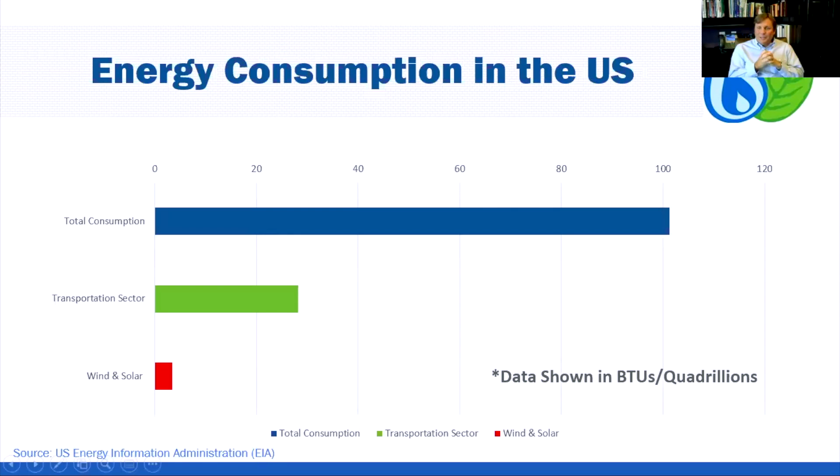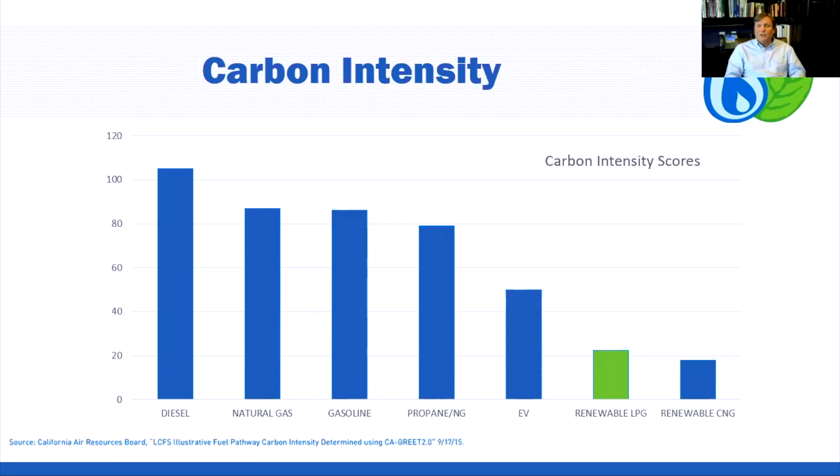Propane coming from natural gas is 79. So even if you blended 30% renewable LPG with 70% fossil propane from natural gas, we're in the 50s, about the same carbon intensity as an electric vehicle. Carbon intensity is something we need to consider. Of course, if we could have enough production for 100% renewable LPG or AutoGas going into vehicles, we'd have less than half the carbon intensity of an electric vehicle. But even blending 70% fossil propane with 30% renewable, we're still in the 50s, about equivalent to an electric vehicle.

Here's another important point: a vehicle today using an internal combustion engine emits 99% fewer emissions than a vehicle in 1970 - 99% fewer emissions than a vehicle from 50 years ago. Why is that important? It's because advancements are being made every single day, week, month, and year in internal combustion technology that goes into vehicles.

This is a simple one - I'm not sure people really understand this transition taking place. A port injection petrol or gasoline engine, if you took a port injection propane engine, you reduce CO2 emissions by 12%. But today, new engines are being produced with direct injection technology. Not all of them, but a great majority of the transition is happening very swiftly.

If you took a direct injection engine, for example a 3.3 liter Ford F-150 pickup truck right now, it's got a direct injection engine in it. But if you took a port injection Ford from 5 years ago and compared it to a current 3.3 liter or 5.0 liter F-150, there's 32% less CO2 emissions. That's a dramatic improvement, and vehicle technology will continue to improve through turbocharging and other methods. Engine technology advancements are really critical to help us meet our emissions goals in this country, because they're going to be more prolific than electric vehicles or hydrogen vehicles.

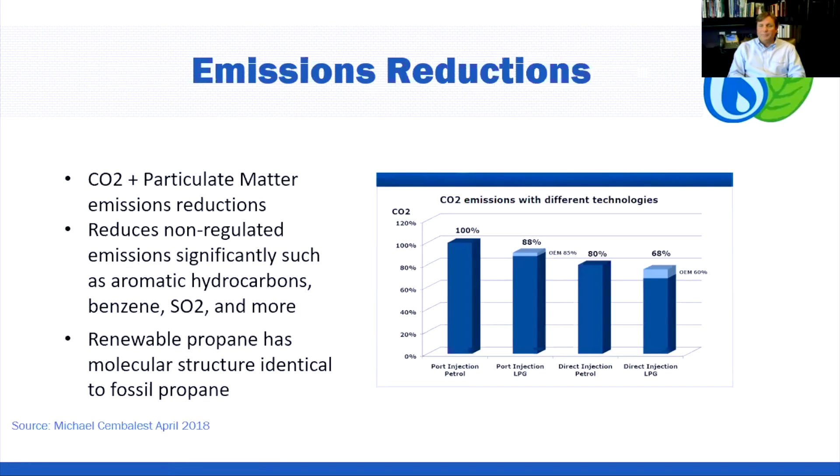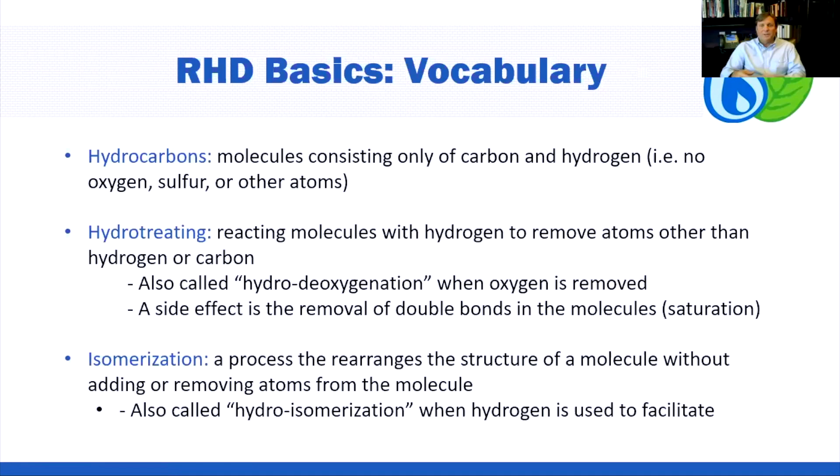So the term which I stumble over frequently is hydrodeoxygenation. That's when oxygen is removed, and the side effect is you remove these double bonds. The other part of this process is isomerization, which rearranges the structures of the molecules without adding or removing atoms. That's a really broad overview of how feedstocks are converted to make propane or diesel.

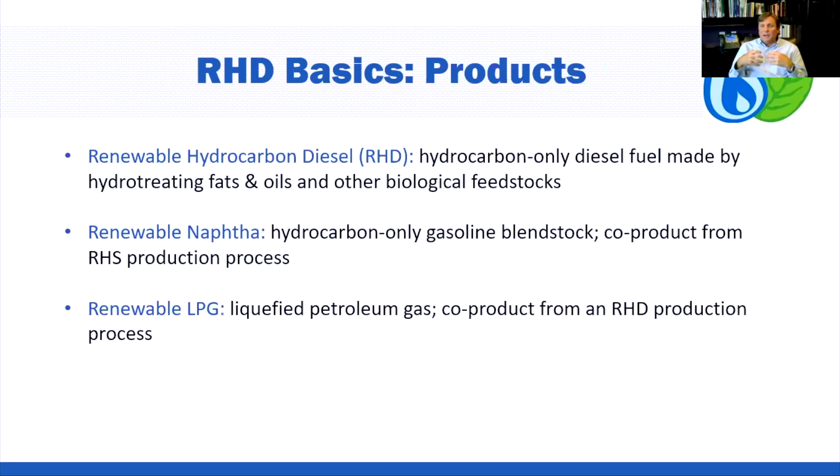Today there's only one renewable diesel refining facility in the United States that has made what I'd say is a reasonable incremental investment to produce propane. That's primarily because there isn't much awareness that renewable propane is something we need in this country, which goes back to the earlier point that we need to state renewable and fossil LPG AutoGas is an important part of our transportation future, and we need to create demand.

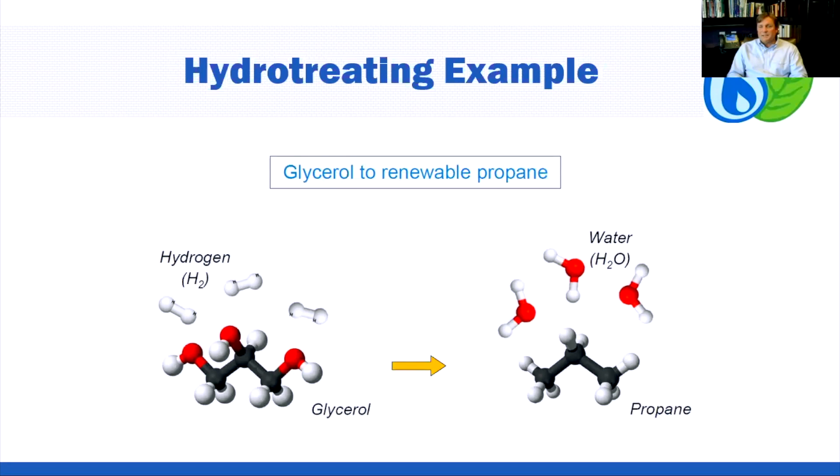So there's a couple of ways, hydrotreating examples, you're turning glycerol into propane. I won't get into how the molecular structure is changed, but the hydrotreating process does it. From that process, out of a refinery, you move renewable propane around the country.

The way the credits work from the federal government on utilization of RINs credits is that you document that it went from the refinery making propane into a transport, into a rail car shipped to Maryland or Delaware, unloaded, and goes through a meter into a vehicle. You have to document that chain of custody that the propane went into that vehicle. It doesn't necessarily have to be the exact molecule - you can do that if you keep it completely separate, but it can be blended in. You just have to show that the renewable propane went into the system.

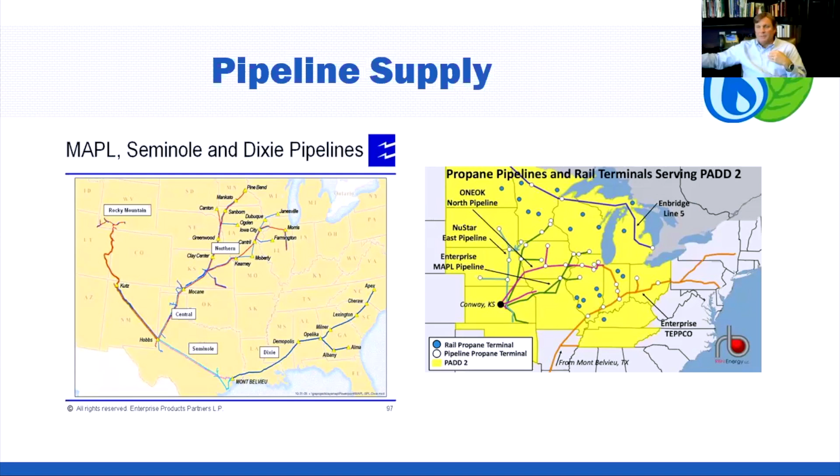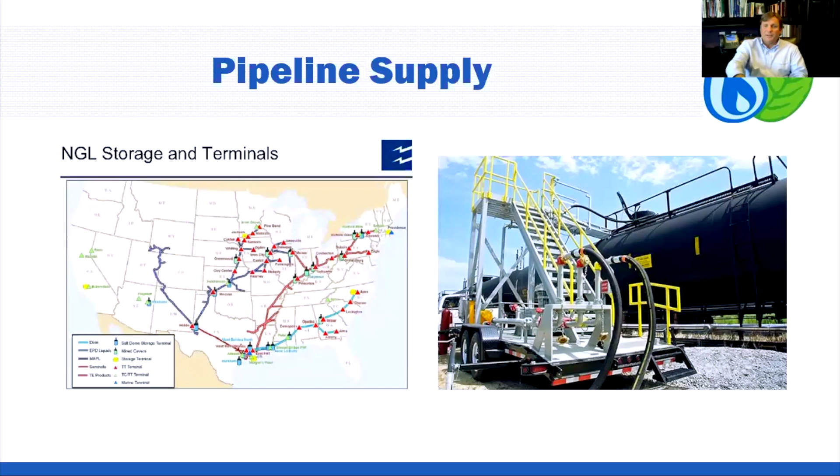Another example, there's a transloader that takes the product from the transport truck, 10,000 gallons or whatever, puts it in the rail car, and ships it anywhere you want to go in the country.

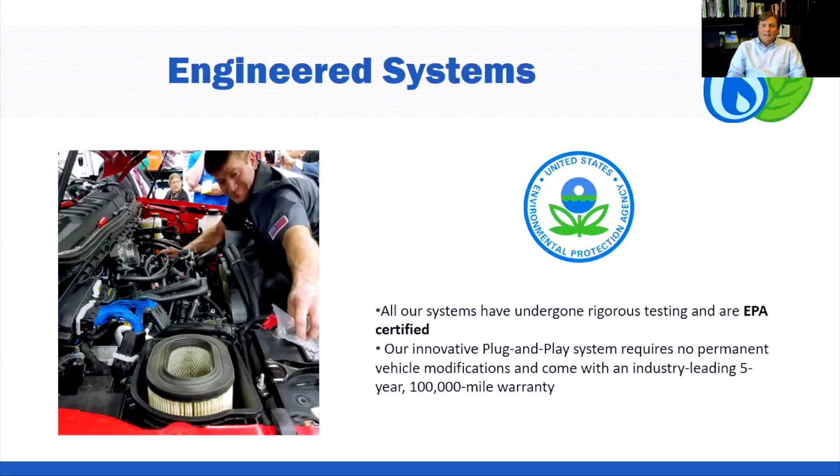A couple of things about Alliance AutoGas that I want to mention. We have undergone a rigorous testing process to meet all the EPA certifications, and we have the largest portfolio of EPA certified conversion systems in the United States. One thing I'm very proud of from the progress made over the last 4 to 5 years is we have a plug-and-play system with only 3 plugs that go into the OEM plugs - no cutting, splicing, whatever. We've created this plug-and-play system that's really foolproof in the installation process, and we have an industry-leading 5-year, 100,000-mile warranty on our systems that we've honored.

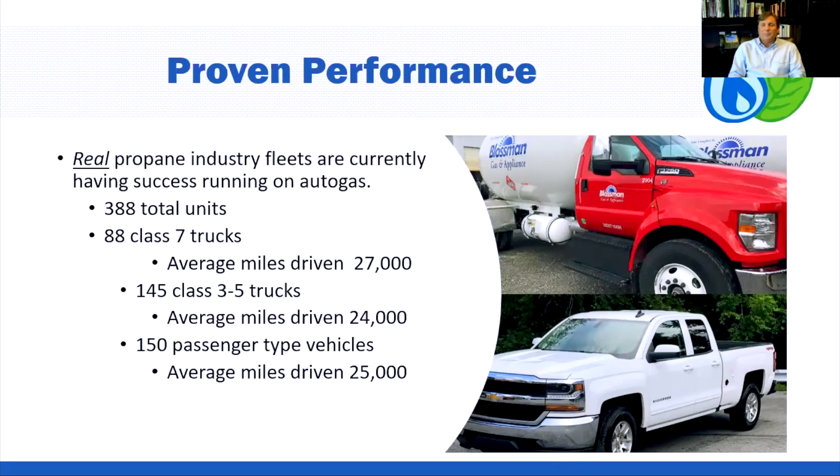This is just something I want to mention - that's an F750 running on the Alliance AutoGas propane system, 6.8 liter. Of course, Ford F650 and 750s have gone to the 7.3 liter, so 550, 650, 750 are now 7.3 liter engines. We have 88 of those trucks and 145 class 3 to 5 trucks in our company at Blossman, and 150 passenger-type vehicles. Our company alone last year saved $1.4 million in fuel.

Important point - the cost of operation of the class 7 trucks, our bobtails running on the F750s, work great with a 3,000 gallon barrel or less. If you have a 3,200 or 3,400 gallon barrel, or operate in very extreme mountainous areas, maybe the F750 isn't going to work for you, but we're hoping that over the next couple of years to move to the 7.3. If you look at the 45 cents per mile cost - that's all in maintenance, fuel, and everything - for our AutoGas bobtail trucks versus 73 cents per mile for the trucks using diesel.

Now what we're experiencing is there's a great transition away from diesel. People have had it - all the after-treatment work, the $5,000 every time something breaks, the maintenance costs associated with diesel trucks, it's out of control. We're becoming an AutoGas market here in the United States, much more closely monitored as an option or an advancement on a diesel engine because of the fuel cost savings, but also the maintenance costs.

And there's something that's critically important: uptime is relevant. Uptime means you're not having to sit and wait for a truck for 3 to 5 days, and you're losing 3,000 gallons or 5,000 gallons in deliveries a day. You can't afford to do that in a propane business.

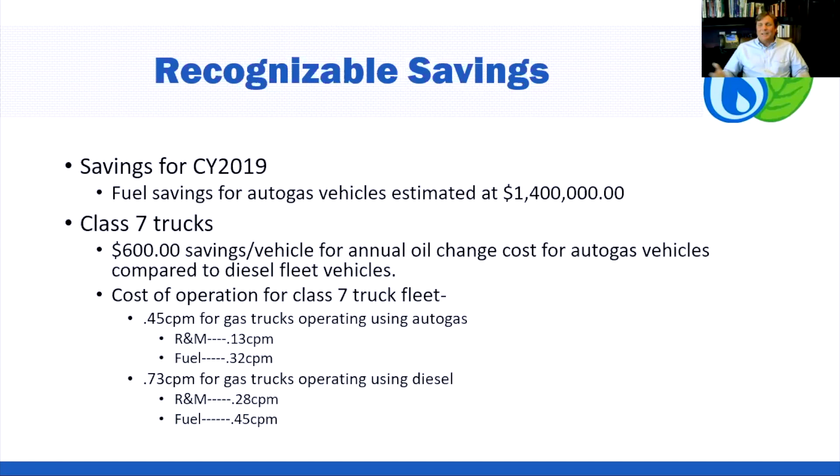Just to summarize everything, it's up to us in the propane industry to create more demand for AutoGas vehicles and for transportation. It will attract refiners willing to make investments in not just renewable diesel, but renewable propane, which will increase the supply and allow our industry, using a drop-in renewable fuel blended with some fossil, to make a significant contribution in reducing carbon emissions in this country. It's not a technical challenge, it's a market commercial challenge that has to be met.

So we can do our part in our industry by converting more of our own vehicles, moving out the diesel vehicles that are becoming increasingly expensive. I think the important thing to understand is the internal combustion engine is not going away, despite what you read and what politicians say. There's billions of dollars being invested in electric vehicles, and of course there's going to be nothing but media attention associated with that. But again, 28 million global propane AutoGas vehicles and 7 million electric vehicles - there's a reason. It's because propane makes a lot more sense.

So I guess we'll leave it at that, and maybe some Q&A.

Okay, so first could you repeat again how many trucks are running on propane versus electric? Yes, as I mentioned, globally there are 28 million propane AutoGas vehicles, and currently in the entire world there's 7.2 million electric vehicles. Now, if you listen to stock market analysts or the media, you would think there's 700 million electric vehicles. There's only 7.2 million out there, and that's their fundamental problem.